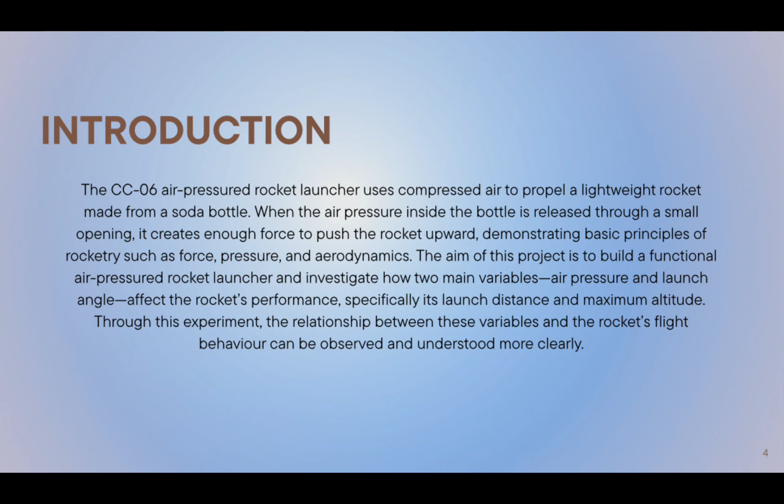The CC06 air pressure rocket launcher uses compressed air to propel a lightweight rocket made from a soda bottle. When the air pressure inside the bottle is released through a small opening, it creates enough force to push the rocket upward, demonstrating basic principles of rocketry such as force, pressure, and aerodynamics. The aim of this project is to build a functional air pressure rocket launcher and investigate how two main variables, air pressure and launch angle, affect the rocket's performance, specifically its launch distance and maximum altitude. Through this experiment, the relationship between these variables and the rocket's flight behavior can be observed and understood more clearly. So I'll pass to the next presenter.

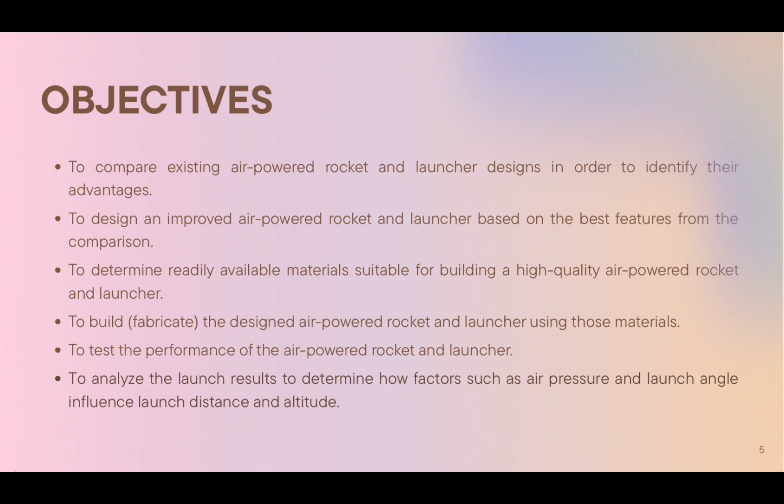This project focuses on designing, creating, and testing a simple air-powered rocket launcher using 1.5-liter bottles and basic materials to understand how different air pressure affects launch performance. The design is straightforward, but it has limitations because of the materials such as the plastic bottle that we use, and cardboard fins are low durability materials which reduce precision and consistency. As we know, in results, the rocket could bend or deform after repeated launches. Manual pumping can also produce uneven pressure, and weather conditions like wind and rain may affect the rocket's stability and flight path. This observation helps us understand both the strength and limitations of our design.

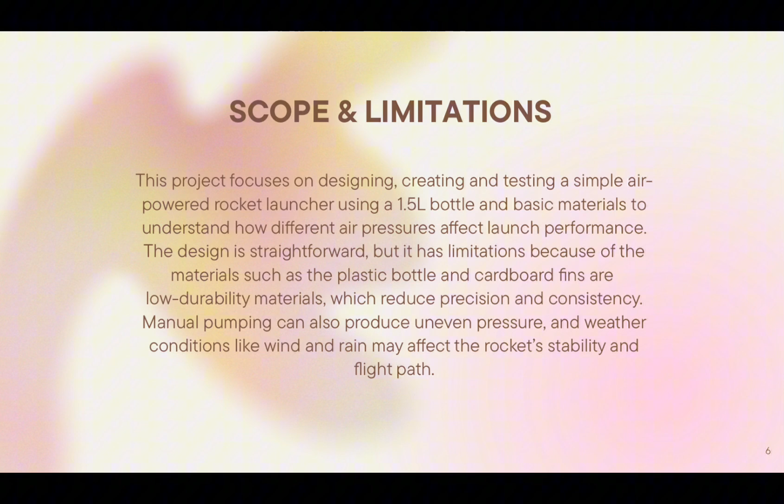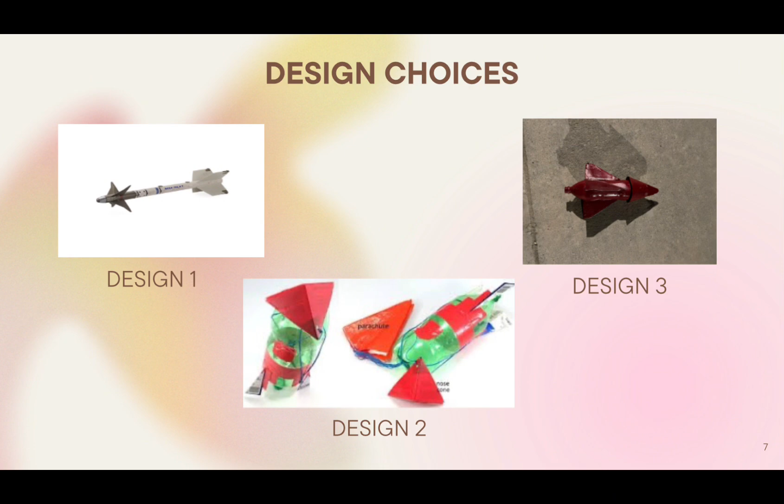Hi, I'm back, Farah. So this is a few design choices that we have discussed, and for now we decide to choose design 3. This is the design of our air rocket. You can see the top view, and there's the measurement of all the compartments of the air rocket itself. We use cardboard, manila card, plastic bottle for the fuselage of the rocket, and manila as the cone head for the rocket.

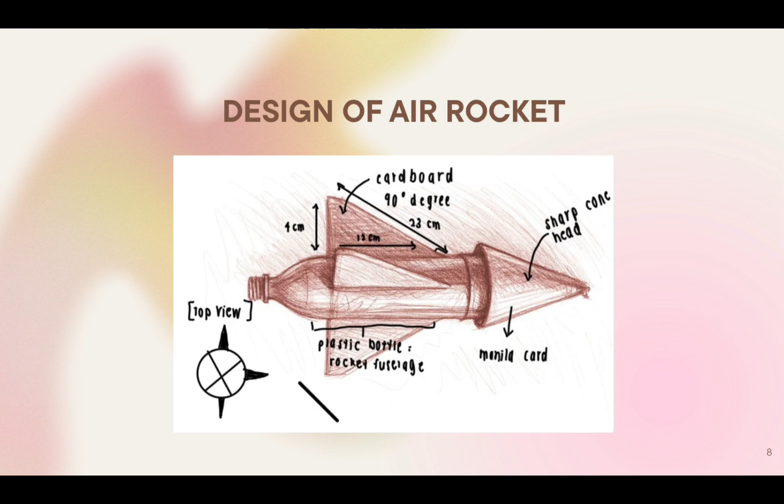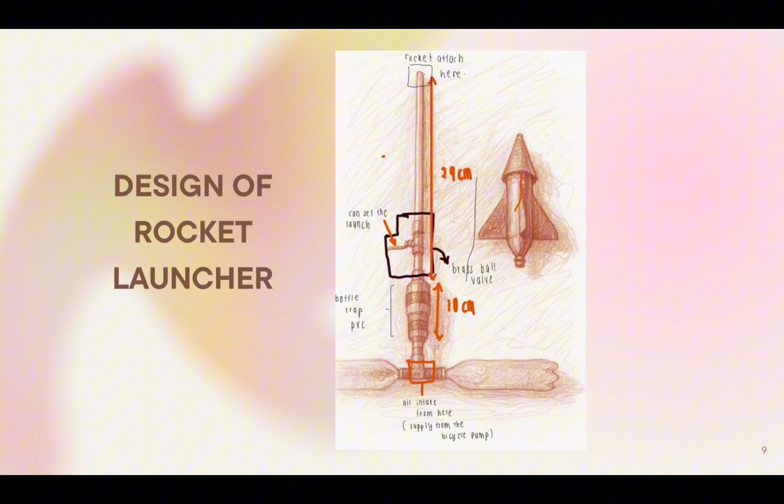Next, we have the design of the rocket launcher, which uses a bicycle pump as the air source to launch the rocket. For this launcher we mainly use PVC pipe and some other PVC pipe connectors. We also tried to make the launcher unique, as you can see, it's a very tall launcher, and from this we can make a better launcher to have a better result.

So now from here we have materials. There's a few materials that we have used, the main one is PVC pipe, and the next one is the PVC pipe connector, and most of the other tools we use duct tape for a better seal to avoid any leakage of air. As you can see, we also use a PVC bottle trap, which will contain the pressure inside the launcher before release.

We also use a brass ball valve, which acts like a switch to turn the pressure on and off and release the pressure to the rocket. Other than that, for this launcher, we also use a 1.5 liter water bottle as the base of the launcher. We need to paint some of the bottle and some of the PVC to also avoid any leakage, and screw some of the parts, and also use the duct tape.

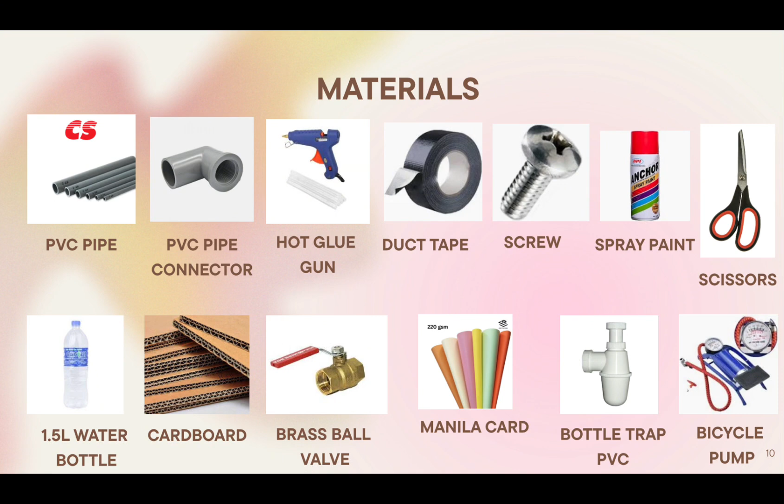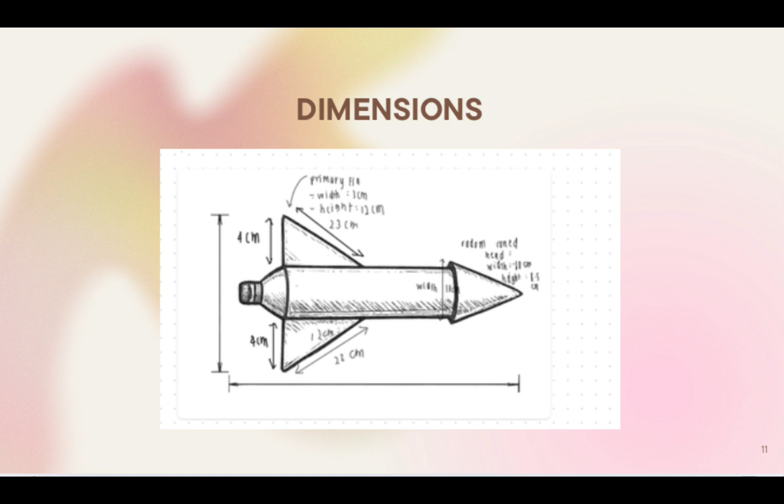And the last one is the dimension for the rocket launcher. As you can see, there is a width of 4 cm and height of 39 cm.

Moving on to literature review. Air-powered bottle rockets demonstrate Newton's third law of motion, where pressurized air stored inside a plastic bottle creates potential energy that converts into thrust when released. As the compressed air rapidly escapes, it produces an equal and opposite force that propels the rocket upwards.

The rocket's performance highlights that stability during flight is achieved through aerodynamic features such as fins, which help maintain a straight trajectory. Fins keep the rocket straight by reducing wobbling, known as shaky movement, and helping it maintain a predictable flight path, as poorly designed fins can reduce stability or cause damage.

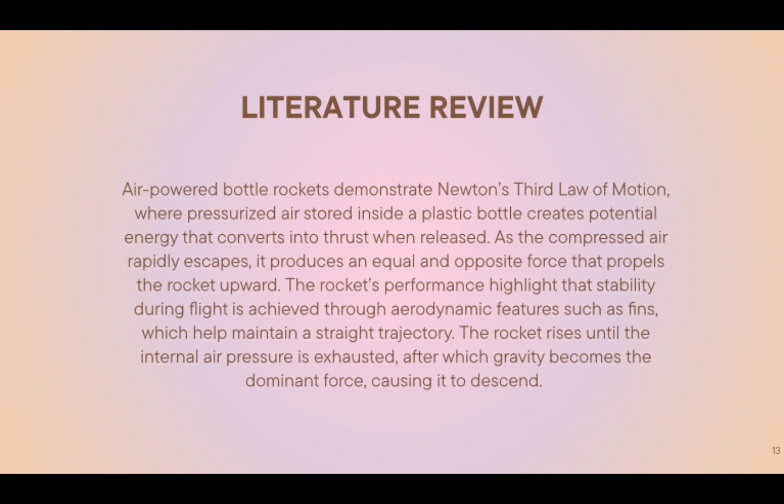The rocket rises until the internal air pressure is exhausted, after which gravity becomes the dominant force, causing it to descend. For the next part, I'll pass it to my friend.

My name is Muhammad Ishnafar bin Rahman. I will talk about the methodology of the air-powered rocket. For the body, gather 2 bottles of water: use 1 bottle to make the fuselage, and cut another to make the radome section.

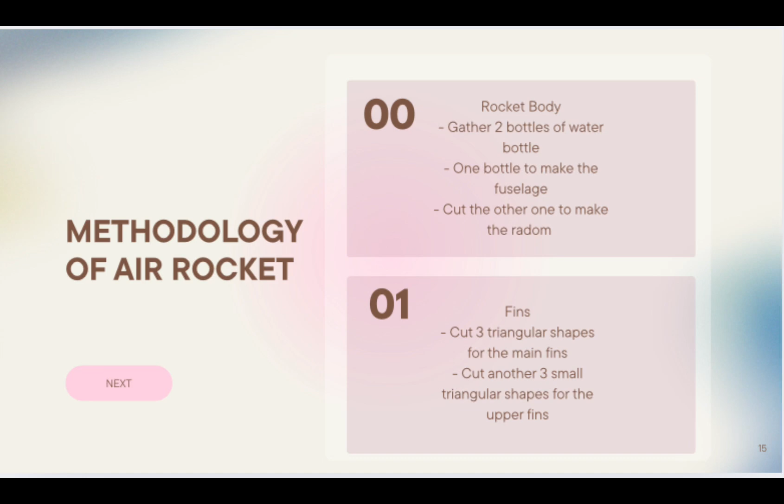For the fins, cut 3 triangular shapes for the main fins, and cut another 3 small triangular shapes for the upper fins.

Third, the nose cone: shape a piece of manila card to form the nose cone, secure the manila cone using duct tape to the radome section. Fourth, mark the fuselage bottle with the appropriate position to attach the fin.

Attach all the material into the rocket using a hot glue gun or duct tape. And lastly,

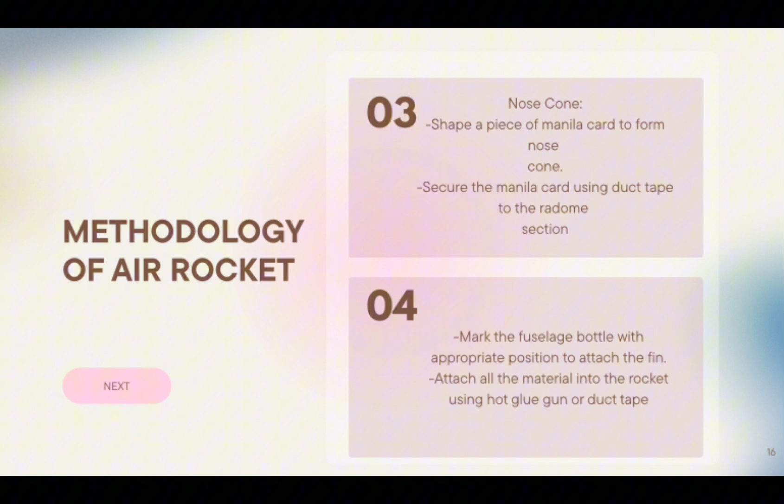Run the first launch test and record the result. Then run the second and third launch tests and record the results. Compare all the results, identify problems, and make modifications based on observation.

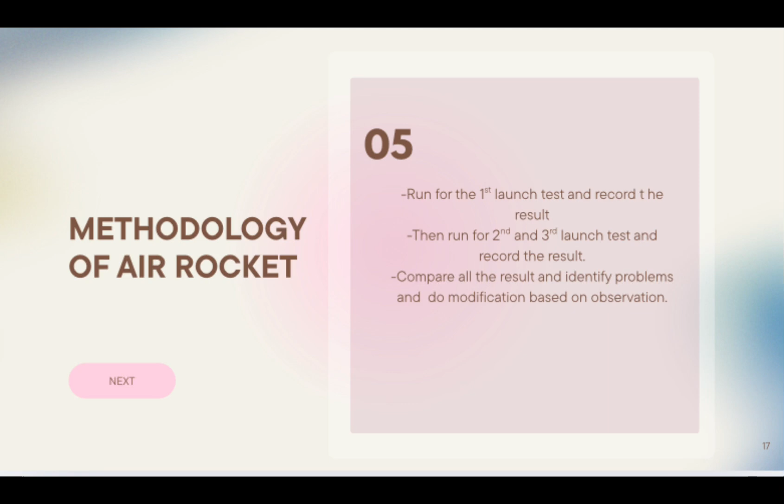Hi, this is me, Farah again. I will talk about the methodology of the rocket launcher, which is: first, connect all the PVC pipes and connectors into one launcher. Attach the bottle trap and brass ball valve to the PVC pipe.

Build the rocket by joining two 1.5 liter bottles together. The second step is to fix the bottle firmly to the PVC T-connector and seal all the joints together to avoid any leakage.

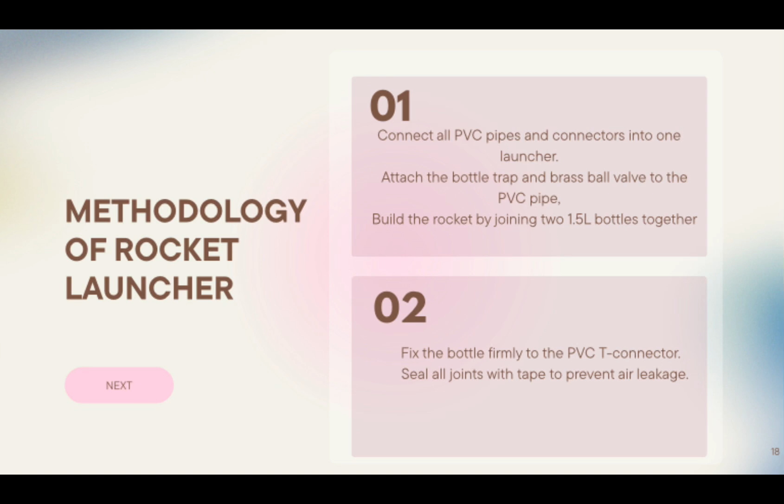The last step is step 3: connect the rocket to the launcher and connect the bicycle pump to the valve, make sure to close the ball valve, pump air into the bottle, and you're ready to launch your rocket.

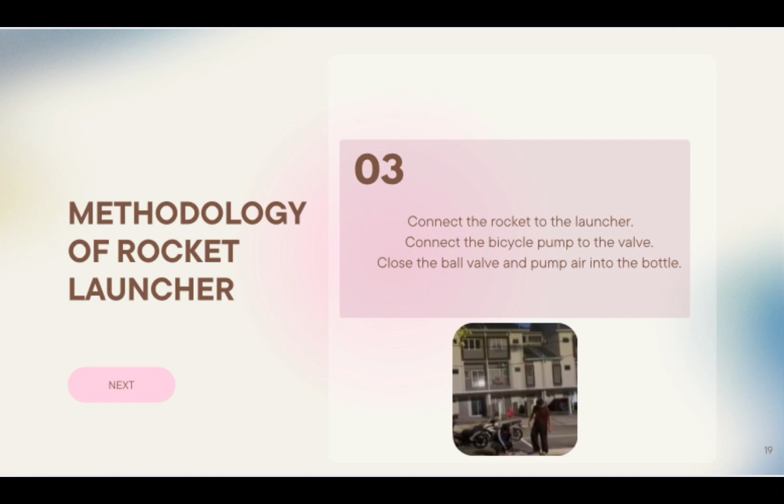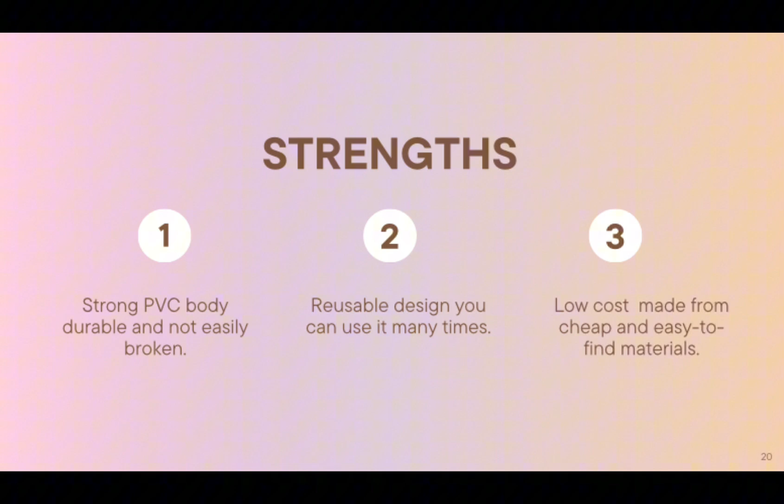For the strengths, we have 6. Number 1: strong PVC body, durable and not easily broken. Second: reusable design, you can use it many times. Third: low cost, made from cheap and easy-to-find material.

Number 4: efficient pressure containment that helps reduce stress concentration. Number 5: aerodynamic efficiency that minimizes aerodynamic drag during flight. And lastly, the design can be scaled to different sizes without fundamentally altering aerodynamic behavior.

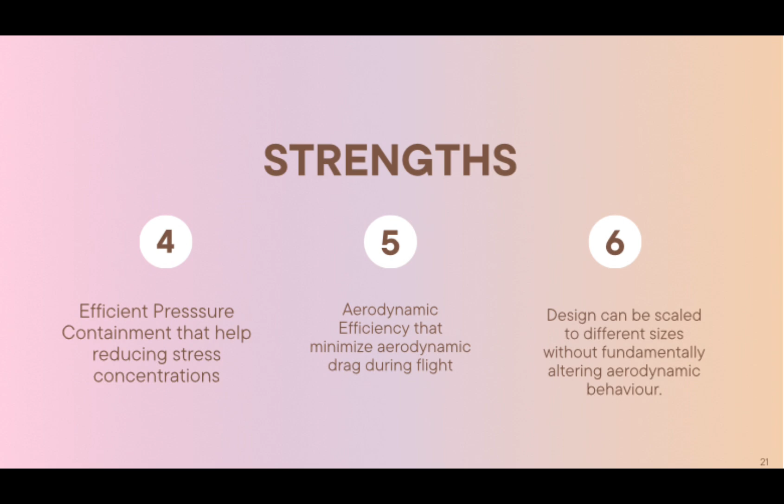So here I am, I'm Farah. I'm going to talk about the weaknesses of this rocket. First is about the pressure system.

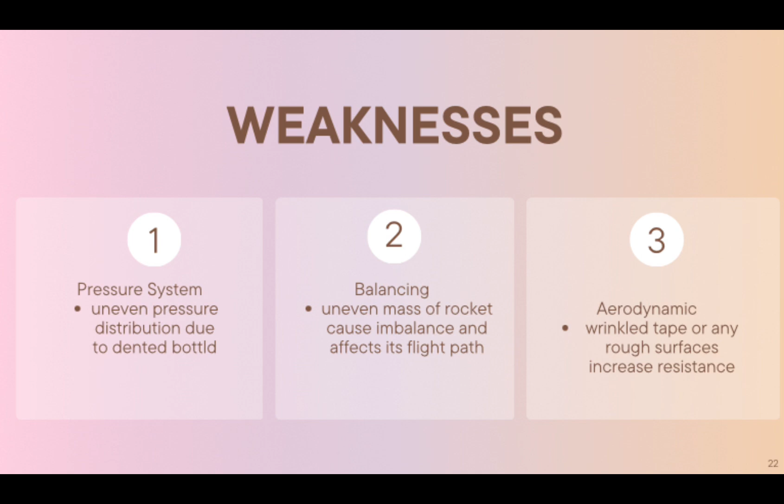The third one is aerodynamic: wrinkled tape or any rough surface increases resistance, which will also increase the drag.

Next, the fourth weakness is the angle of the launcher. As you can see, we launched the rocket with an improper angle, and this can cause a stall or only short distance traveled. Next is because of the sealing.

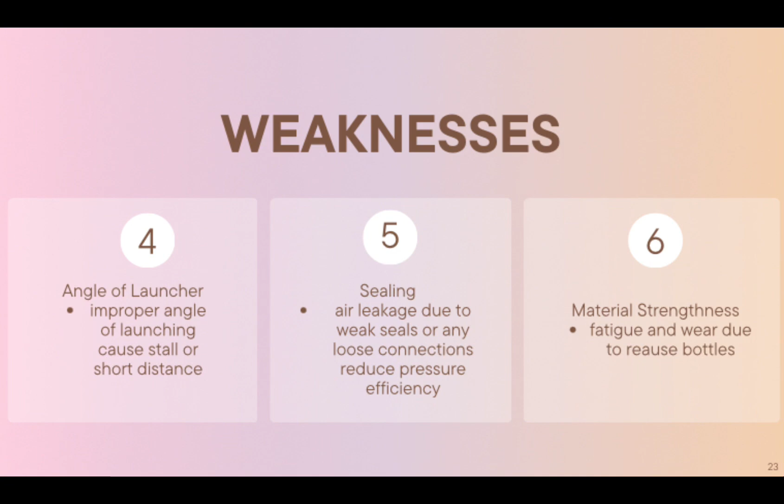Weak or bad sealing will cause air leakage, or any loose connections and reduce pressure efficiency. And the last one is the material strength, which can also affect performance.

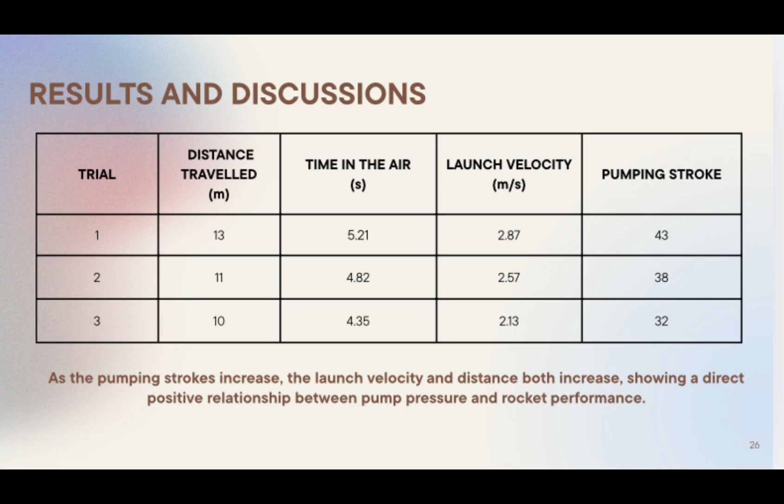So here's a summary of the image, and these are the results and discussion that we got. As the pumping stroke increases, the launch velocity and distance both increase, showing a direct positive relationship between pump pressure and rocket performance.

So what we can conclude from this project is: in conclusion, the Cloud Chaser 06 air rocket project performed exceptionally well throughout its development. To achieve this kind of success, we required multiple design refinements to ensure optimal performance and improved outcomes. So the project has been a success for all of us.